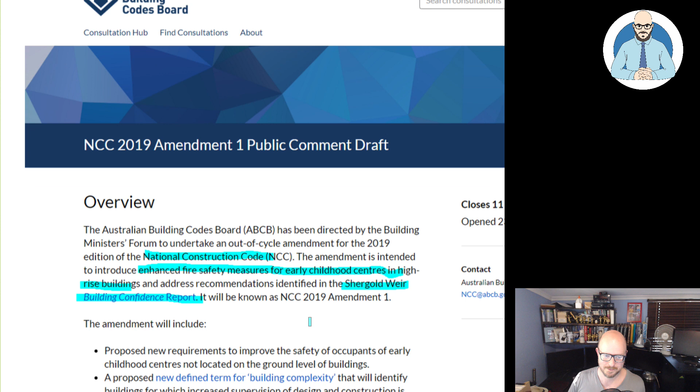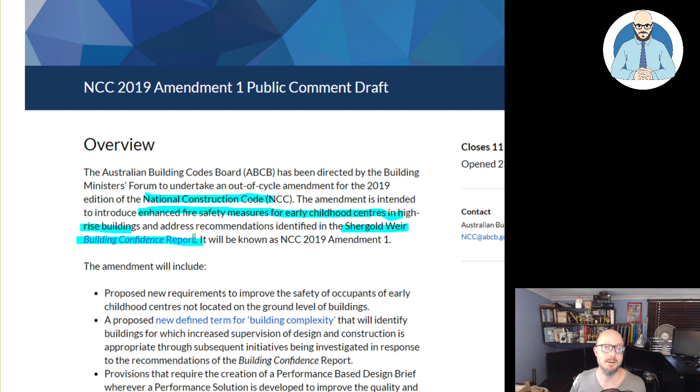Childcare centres in high-rise buildings, because I've seen a few of those and we've looked at them for clients. They're becoming more and more popular. The amendments will include proposed new requirements to improve the safety of occupants of early childhood centres not located on the ground levels of buildings.

A proposed newly defined term for building complexity that will identify buildings for which increased supervision of design and construction is appropriate through subsequent initiatives being investigated in response to the recommendations of the Building Confidence Report. This is interesting. Increased supervision of design and construction.

So provisions that require the creation of a performance-based design brief wherever a performance solution is developed to improve the quality and clarity of such solutions for approval and auditing purposes. This is also in response to parts of the Building Confidence Report recommendation. Okay, this is a performance solution. Now, if you're not familiar, our construction code is actually pretty good. It allows for adaptation and innovation.

That means you can take the code and it'll have a performance requirement that, say, this type of requirement is necessary for acoustic separation between two spaces. Now, you can achieve that anyway. You can hire your own engineer to design a custom system, put a report and submit it, and that will be meeting the performance requirements for the National Construction Code. Okay, and that ticks a box.

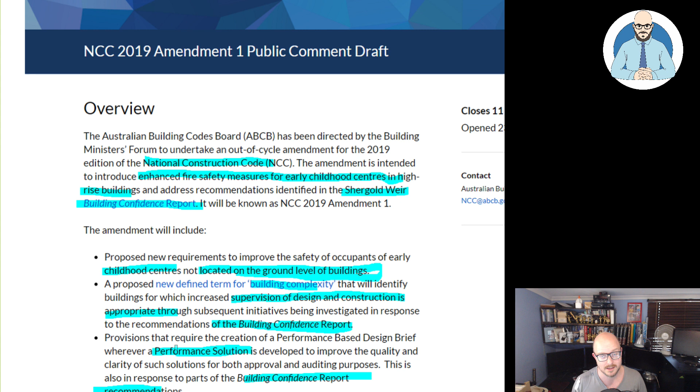You could get a system from a walling manufacturer and install it, and they've got a certificate that they've tested, and that would meet the requirements of the deemed to satisfy provisions. So under the code, they've got the performance ones where you can pretty much invent something. Then they've got deemed to satisfy, which is system instruction in the building code that you can follow, like the size of a footing for a residential house on a standard type of soil. It really simplifies the process.

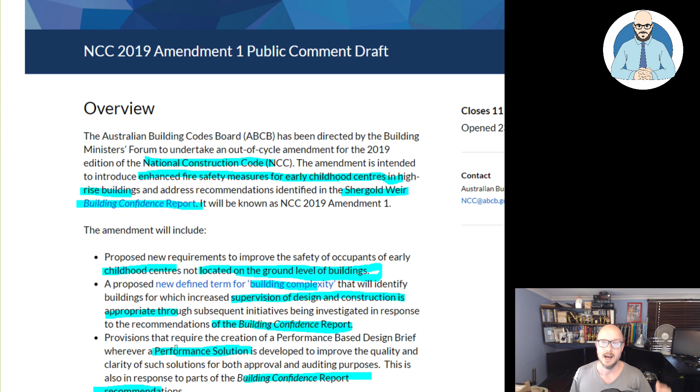So there's two approaches to it. There's an innovative solution and there's a prescriptive solution. So here they want to have a performance-based design brief wherever a performance solution is developed. Okay, so that's very interesting.

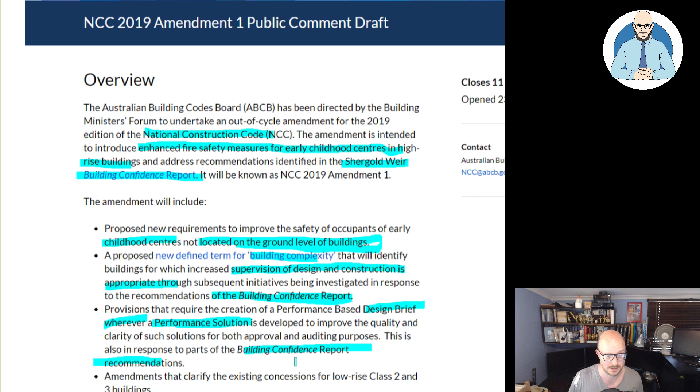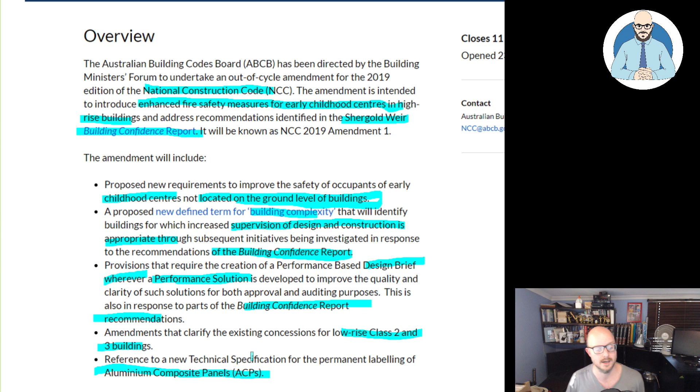Amendments that clarify existing concessions for low-rise class 2 and 3 buildings. Reference to the new technical specification for the permanent labeling of aluminium composite panels. So they're responding to the flammable cladding issues that we've had. So notice this is a response that's coming out of issues that have happened. This isn't going to address any of those buildings, but it's a response to that.

So, okay, links to the public comment drafts, NCC 2019 Amendment 1, are provided below. So you can have a look at these, and you can leave a comment. You can provide a comment and put your input in. So let's have a look.

We will go through first the revised definition of building complexity. The NCC 2019 Amendment 1 public comment draft contains a new defined term for building complexity. This definition establishes a range of complexity levels from 0 to 4, with 0 being the least complex and 4 being the most complex. A building's complexity level considers the potential number of occupants in the building, the vulnerability of those occupants, and the complication presented by technical, geometrical, or environmental factors.

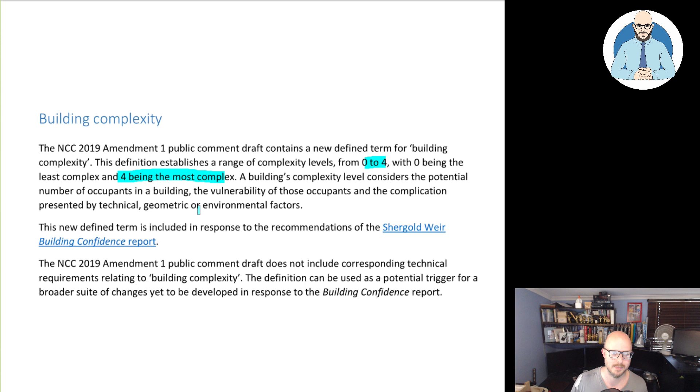Here's the thing with regards to this. The occupants of buildings, that's a big part of designing. As an architect, engineer, anyone, when you're designing a building, you need to take account of the number of people that are in there. One problem with Airbnb is that it changes the occupation numbers and the knowledge that the people will have of that building from one class to another class. It goes from an apartment building to a hotel. So people have a different understanding. There's different requirements for safety that are often ignored.

This new defined term is included in response to recommendations of the Shergold Weir Report, Building Confidence Report. The NCC 2019 Amendment 1 public comment draft does not include corresponding technical requirements relating to building complexity. The definition can be used as a potential trigger for a broader suite of changes yet to be developed in response to the Building Confidence Report.

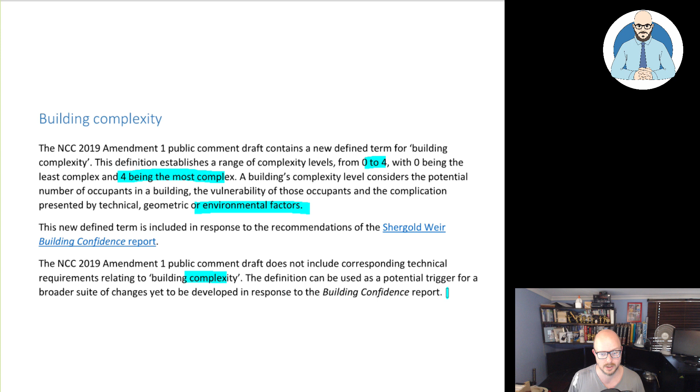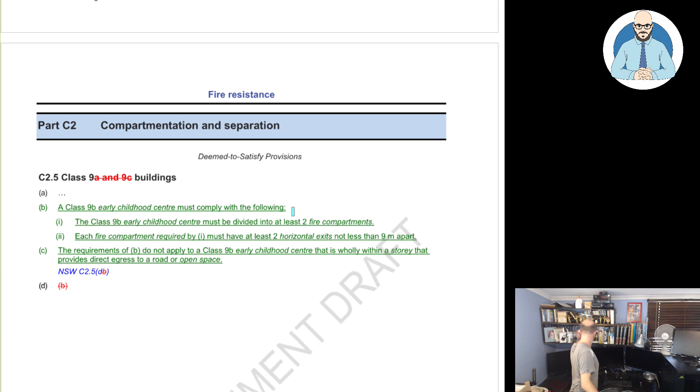Okay, let's have a look at Volume 1, the amendments they're going to give to Volume 1. So guys, this is the... Okay, hang on. Where is it? Here we go. I've got the 2016 version.

I don't buy the physical copies now since the PDFs are free. You know, care for the environment and all that jazz, and I'm a cheap person.

So, Volume 1 is for Class 2 to 9 buildings, everything other than domestic detached houses, pretty much. A big fat book that'll put you to sleep. And here we go. The first change is in Part C2, compartmentation and separation.

Why do I even try to read? Seriously. I blame it because I learned German first as a child. That's what I blame it on.

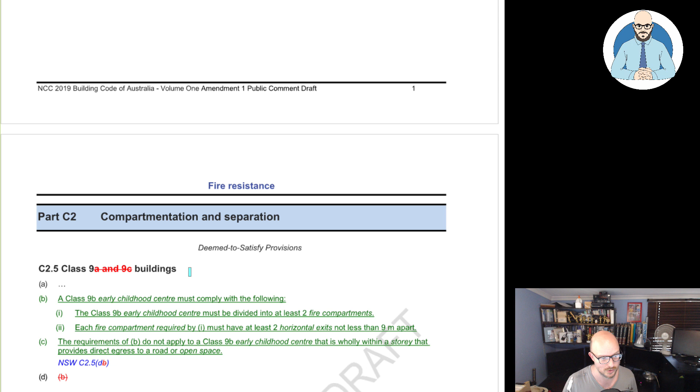So they've removed, it's just Class 9 buildings. So A. So B, they're adding this. A Class 9B early childhood centre must comply with the following. A Class 9B early childhood centre must be divided into at least 2 fire compartments. Each fire compartment required by (i) must have at least 2 horizontal exits, no less than 9 meters apart. The requirements of (b) do not apply to a Class 9B early childhood centre that is wholly within a storey that provides direct egress to a road or open space.

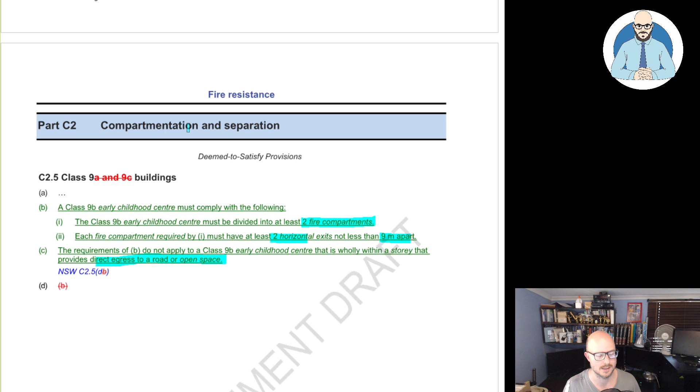So here you go. If one of these spaces catches on fire, there's 2 compartments. So one place is completely separated from the other, and there's 2 options to egress out of each. So that's going to provide significantly increased evacuation options for the children in those spaces. But it's going to be more of a challenge retrofitting these to existing buildings. It's not insurmountable. It's just something you need to be aware of. And they've deleted this clause here.

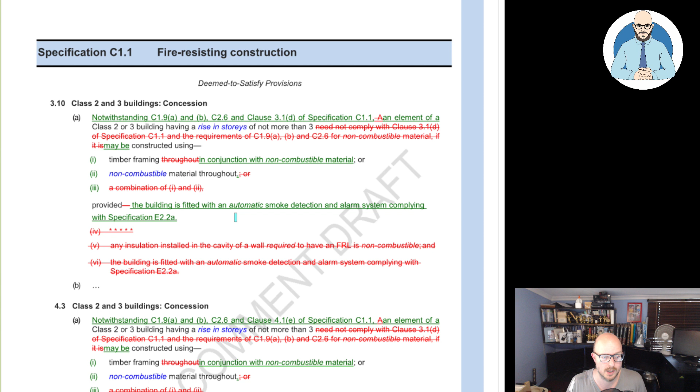Okay. Specification C1.1 fire-resisting construction, Class 2 and 3 building concession. Notwithstanding C1.9(a) and (b), C2.6 and Clause 3 of Specification C1.1, an element of a Class 2 or 3 building having a rise in storeys of not more than 3 may be constructed using timber framing in conjunction with non-combustible materials or non-combustible materials throughout, and they're getting rid of that, provided the building is fitted with an automatic smoke detection and alarm system complying with Specification E2.2a. So you can see here what they're removing.

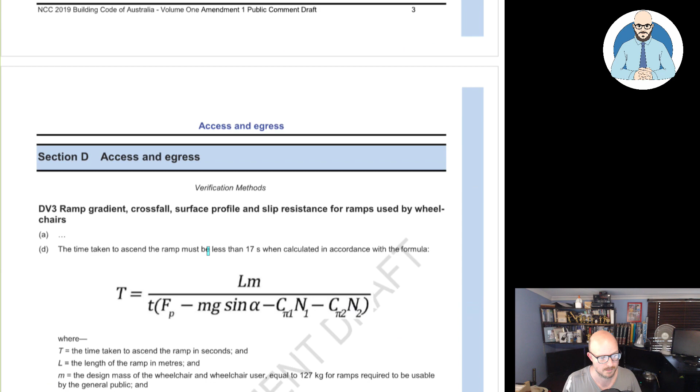Class 2 and 3 building concession, notwithstanding C1.9(a) and (b), C2.6 and Clause 4.1(e) of Specification C1.1, an element of a Class 2 or 3 building having a rise in storeys of not more than 3 may be constructed using timber frame or non-combustible material throughout, provided it's fitted with an automatic smoke detection alarm system compliant with this specification. Okay, cool. So access and egress. Okay, what are they? They're not really making any changes here, are they?

Provision for escape, number of exits. Exits from a class 9C building, 9B early childhood centres, and patient care areas in class 9A healthcare buildings. In a 9A healthcare building, 9B early childhood centre, and a 9C building, at least one exit must be provided for every part of the story which has been divided into compartments in accordance with C2.2 or C2.5. So they've added 9B. They're putting more onerous requirements on the early childhood centres. And they changed that from lowercase to an uppercase.

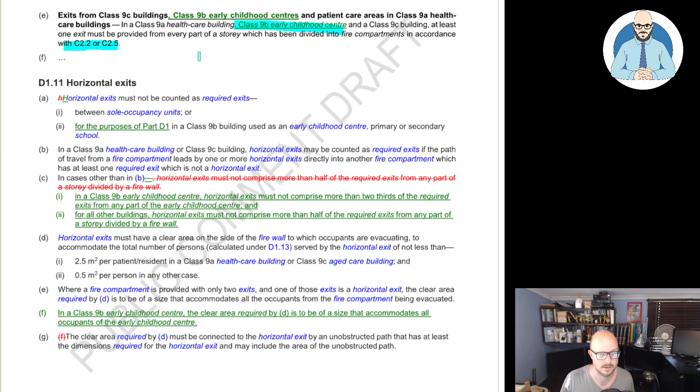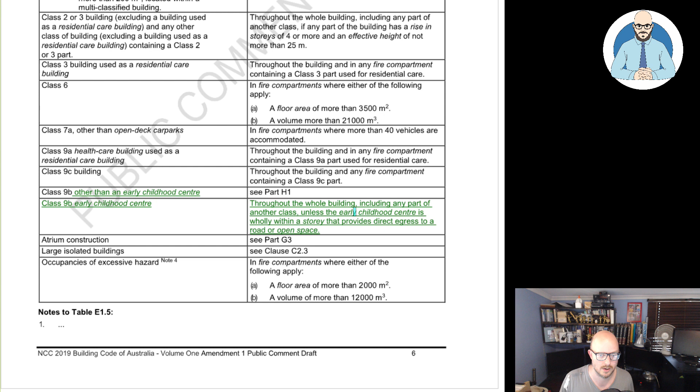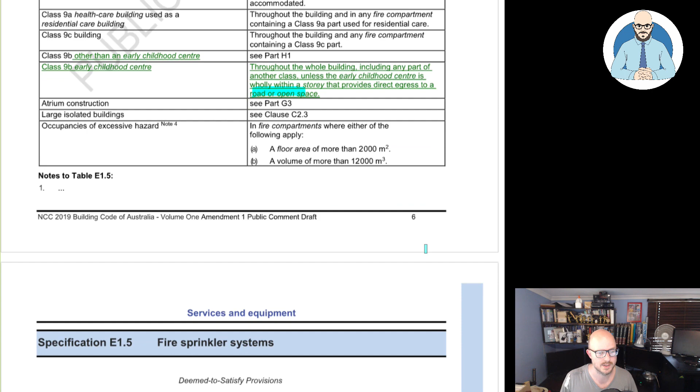Horizontal exits for the purpose of part D1. Here we go. So they're just adding the early childhood centres to these existing requirements for the 9A healthcare buildings and the 9C. Firefighting equipment, here we go. 9B early childhood centres throughout the whole building, including any part of another class, unless the early childhood centre is wholly within the story that provides direct egress to a road or open space. So it looks like they're increasing the egress requirements for these buildings. So it's really nothing to do with the apartment issues that we've had. Guys, this is just with early childhood centre buildings.

So what else has happened in the media? Has anyone heard any issues? Have any childhood centres been evacuated?

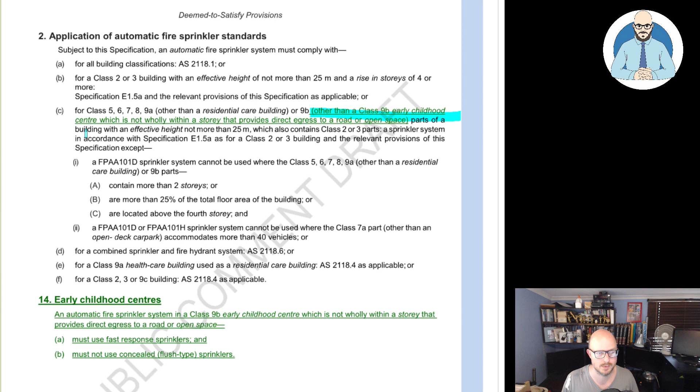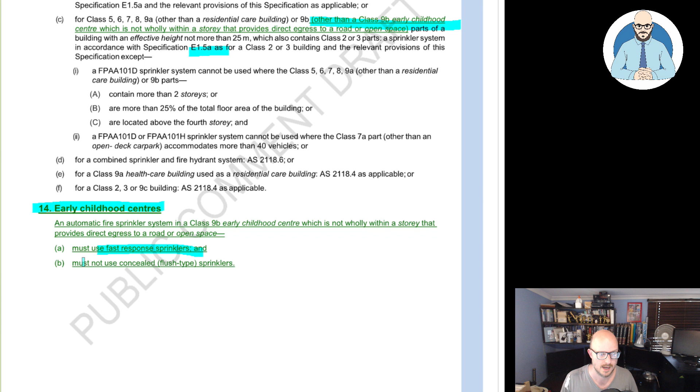Application of automatic fire sprinkler standards. So for class 5, 6, 7, 9A, and now they're adding 9B, other than a 9B early childhood centre which is not wholly within a story that provides direct egress to road or open space. Parts of a building with an effective height no more than this. Okay, sprinkler system in accordance with this specification. Early childhood centres. An automatic fire sprinkler system in a class 9B early childhood centre, which is not wholly within the story that provides direct egress to a road or open space, must use fast response sprinklers and must not use concealed flush type sprinklers.

See, this is the type of details that can get onto the drawings and then needs to get checked. And the certifier will probably go through, do an inspection, notice particular ones, they may miss something. There's no clerk of works on site checking all of these things as well to provide them with support.

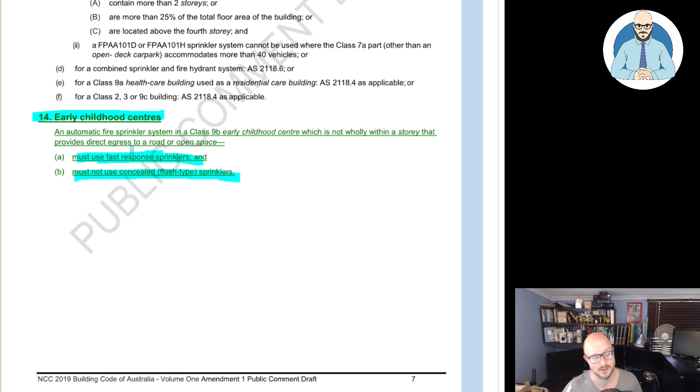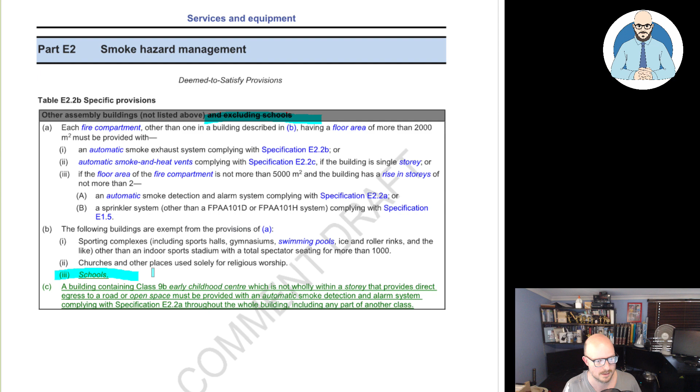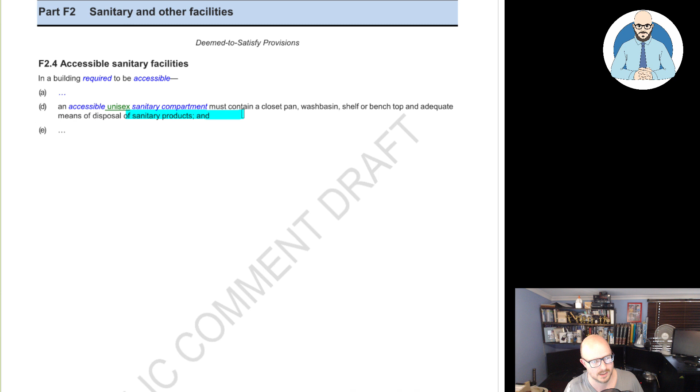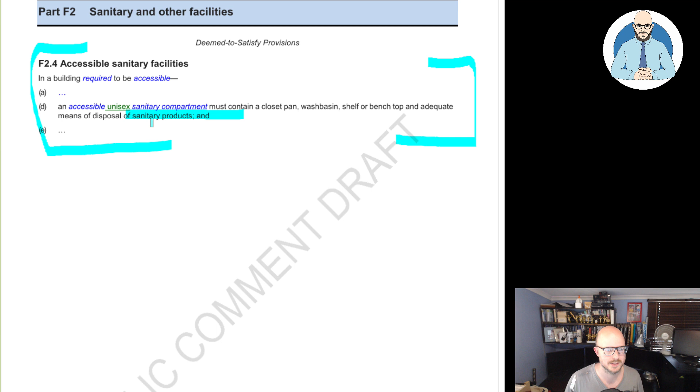Smoke hazard management. Other assembly buildings not listed above and excluding schools. Okay, they've removed the excluding schools requirement. They've added schools to this. A building containing 9B early childhood, which is not wholly within a story. Okay. What do we have here? Visibility in an emergency. So they're adding some changes here with signage. An accessible unisex sanitary compartment must contain a closet pan, wash basin, shelf or bench top, and adequate means of disposal of sanitary products. I'm surprised that has changed. Okay. Well, the thing is, all people with disability toilets are unisex anyway, so I'm not even surprised with that.

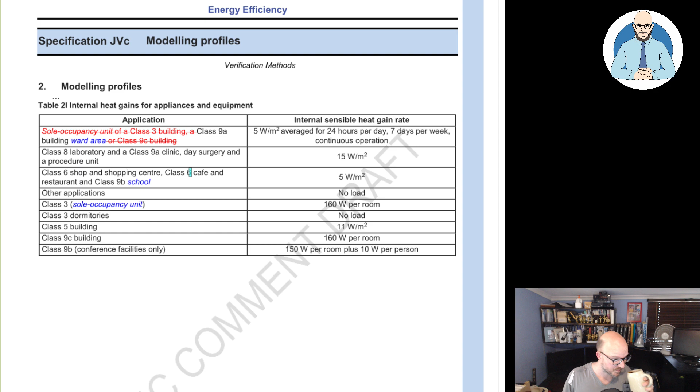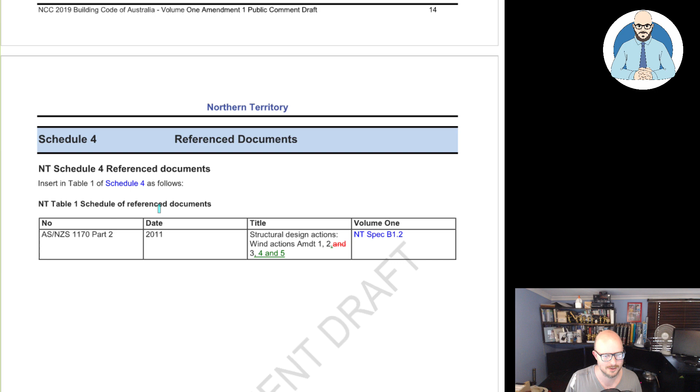So modeling profiles, energy efficiency, okay. Cool. Building fabric stuff, air conditioning, ventilation, really exciting things for the engineers to look at, some reference documents changes. So this is the changes to volume 1. Most of it is to do with early childhood egress out of high-rise buildings, which is going to become more and more common. So all those ones that I've seen out recently, I wonder if they're going to comply with these changes. So I have to take account of that in future.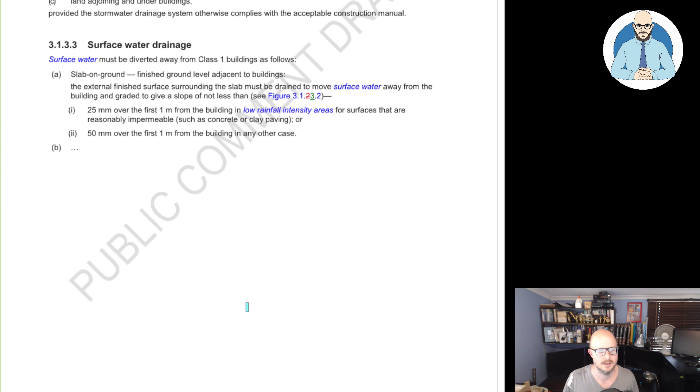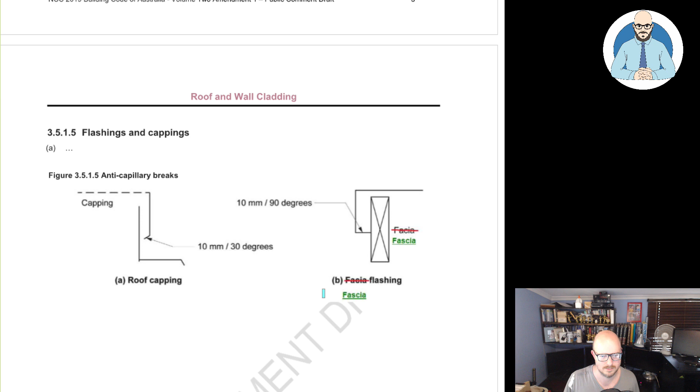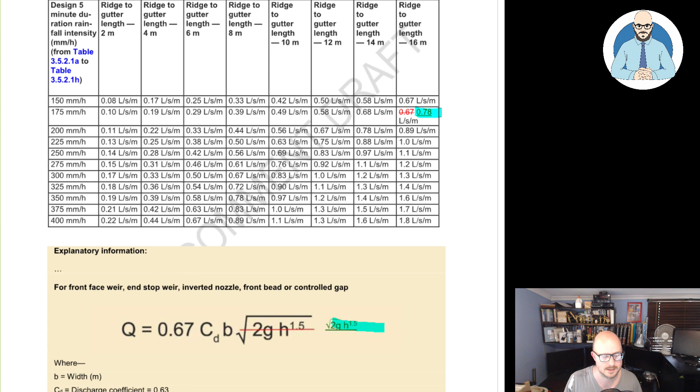So this is volume 2. So you've got volume 1, the bigger buildings, volume 2, the little buildings, detached houses. So what are the changes here? Nothing in drainage, articulated full masonry and articulated masonry veneer. Okay. They changed the spelling, I guess. Changing this formula slightly for overflow volume calculation measures. Okay, ridge to gutter. They've increased that liters per second per meter. Cool. What are they adding here? Okay, so here we go.

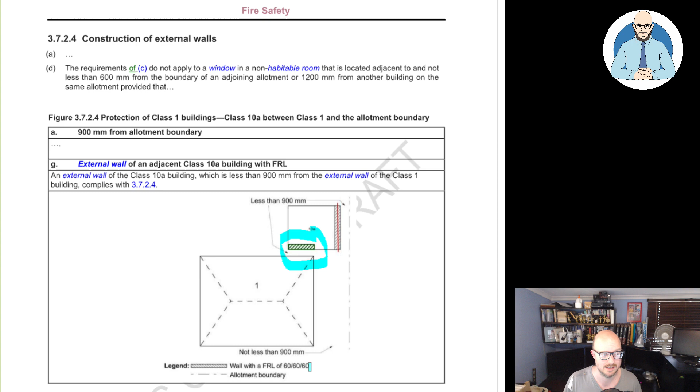Walls with a FRL of 60/60/60. So this wall here, I'm assuming they've added less than 900 millimeters within the building. Okay, that's from a class 10. So this is a garage to your house. That wall needs to have 60/60/60. And that's not too hard to achieve, that rating. Some more fire rating. Yes, well, of course you want that there. I'm surprised they didn't need that.

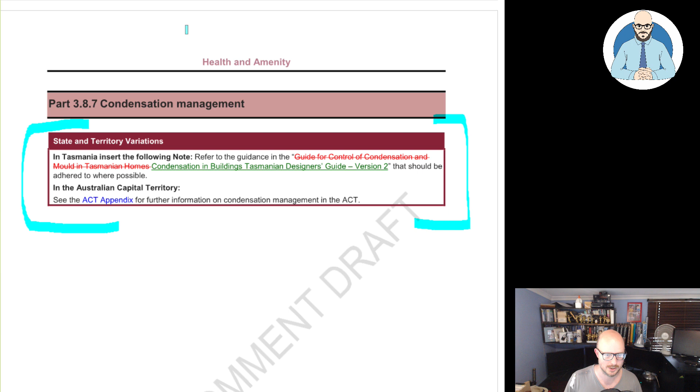Condensation management. Condensation in Buildings Tasmanian Designers' Guide version 2. Okay, this is for the Tasmanians. Actually, yep, Luke, if you're watching, you want to build your own homes, you need to read this, mate. It's changed. Chimneys, I think I've drawn one chimney once in my entire career.

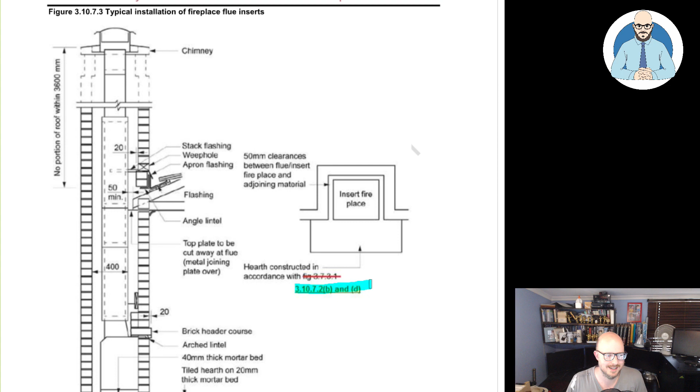And so that's it. Oh, hang on, and there is the governing requirements for common schedules. So Amendment 1, public comment documents. Let's have a look. So where a performance requirement is proposed to be satisfied by a performance solution, the following steps must be undertaken. Prepare a PBDB in consultation with relevant stakeholders. Carry out analysis including modeling and/or testing as proposed by the PBDB. Collate and evaluate results from B against the acceptance criteria. Prepare a final report that includes performance requirements and deemed-to-satisfy provisions identified, identification of all assessment methods used, details of steps A to C, and confirmation that the performance requirements have been met.

Okay, this I think is actually a really good idea, because what can happen is a mistake can happen, or people can cut corners and do a dodgy performance solution, just get a letter written to get around it, or the certifier can just tick and flick. Oh yeah, I'm out of trouble, no problem. So this is requiring a more onerous process, which should be happening anyway.

If you're doing a performance-based solution to get around, or as an innovative approach for the National Construction Code, you should do this. Every professional should have this level of detail. It's just writing a brief. You need it for your own records, for your own due diligence. So I see that as actually quite a good thing.

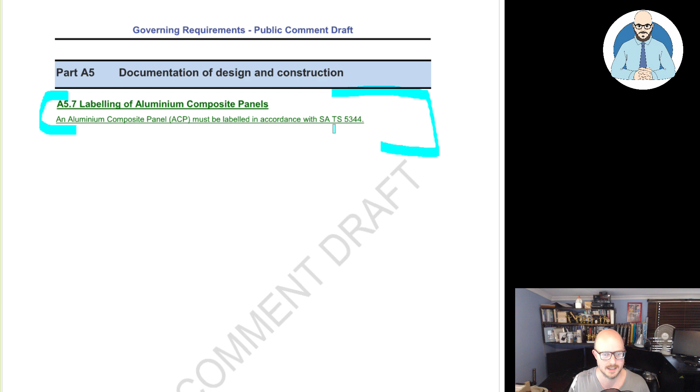Labeling of aluminium composite panels. Aluminium composite panels must be labeled in accordance with SA TS 5344. Fantastic. Here we go. Here's the building complexity section. Okay. Building complexity means through geometric, technical, or scale parameters that increase the risk of oversight or error in a situation where the consequences of oversight or error will be significant. Table 2 defines the building complexity levels from level 0 to 4.

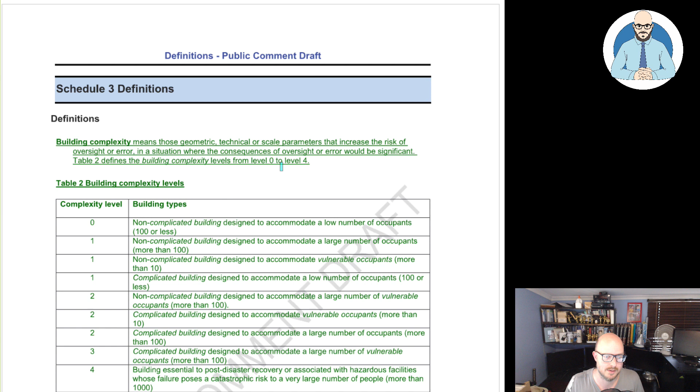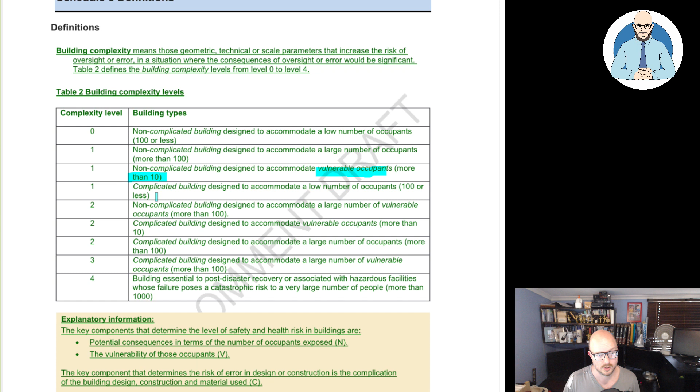So why is this in volume 1? Oh wait, no, sorry, this is in volume 2, it's in its own separate document. Complexity 0: non-complicated building designed to accommodate a low number of occupants, 100 or less. 1: non-complicated building designed to accommodate a large number of occupants, more than 100. Non-complicated building designed to accommodate vulnerable occupants, more than 10. 1: complicated building designed to accommodate a low number of occupants.

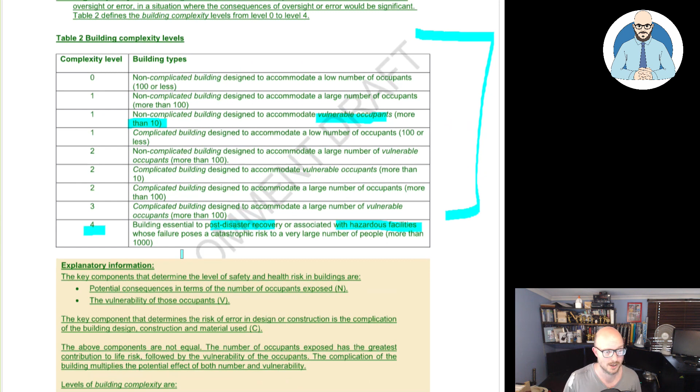2 is non-complicated, designed to... Okay, you can read the rest of this. 4: building essential to post-disaster recovery or associated with hazardous facilities. So I wonder if this is going to have, like, should you be able to do design and construct for some of these? Or if you have design and construct, you need a third party as a clerk of works.

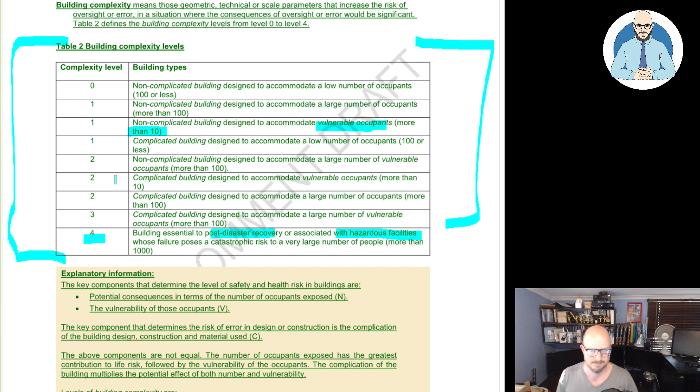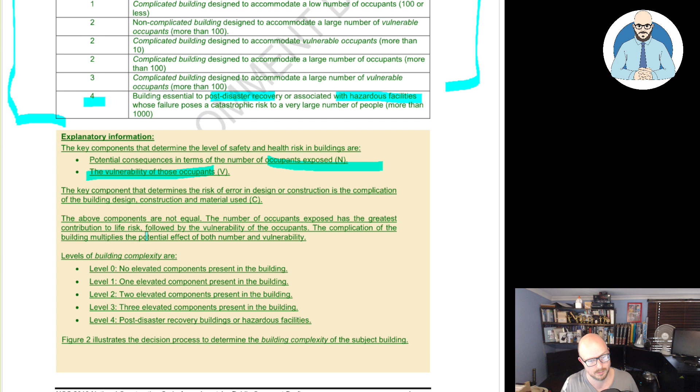The key components that determine the level of safety and health risk in buildings are potential consequence in terms of number of occupants exposed, and the vulnerability of those occupants. The key component that determines the risk of error in design and construction is the complication of the building design, construction, and material used. The above components are not equal. The number of occupants exposed has the greatest contribution to life risk, followed by the vulnerability of the occupants. The complication of the building multiplies the potential effect of both numbers and vulnerability.

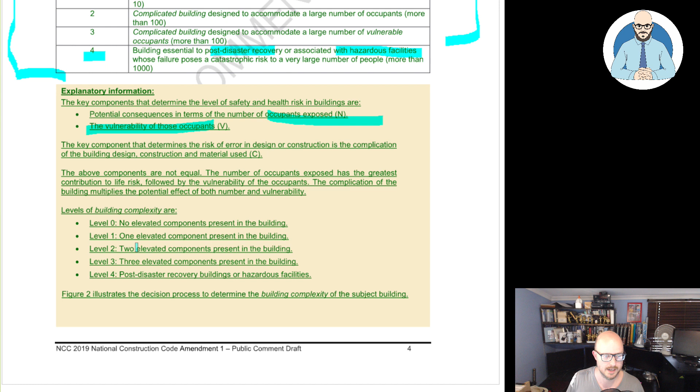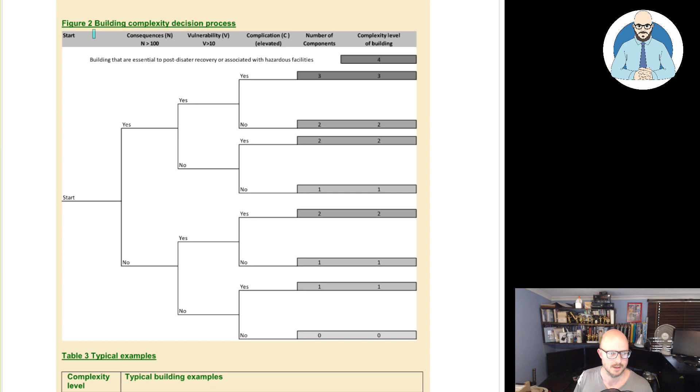Levels of building complexity: no elevated components, and 4 is post-disaster, 3 is elevated, 2 is elevated. Okay, what's the difference? Anyway. Oh, 3, how many elevated components there are? Okay, so here we go. Buildings that are essential to post-disaster recovery, that's 4. So consequences, number greater than 100. So here's the typical examples. Complexity level 0, class 1, a single dwelling. So normal house.

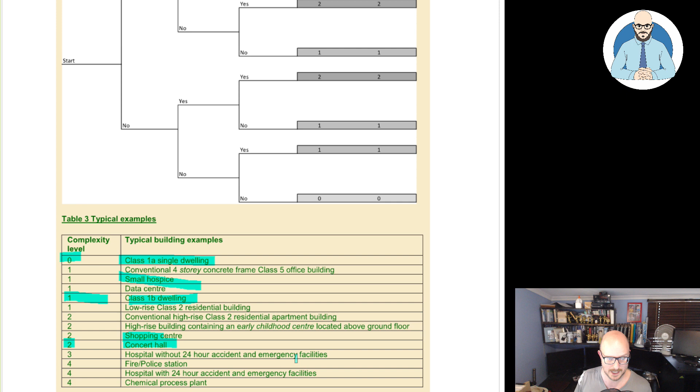Complexity 1 is a small hospice. 1B is a class 1B dwelling. Complexity 2 is a shopping center or a concert hall. 3 is a hospital without 24-hour accident. And then 4 is a chemical processing plant or a hospital or a fire or police station. Complicated buildings means a building having one or more of the following attributes. For volumes 1 and 2, construction using innovative materials or systems, or materials not complying with the BCA deemed-to-satisfy provisions. Okay, cool. We can see why they're responding to that.

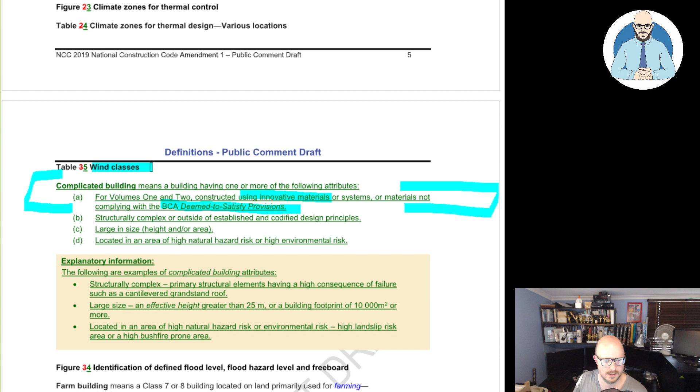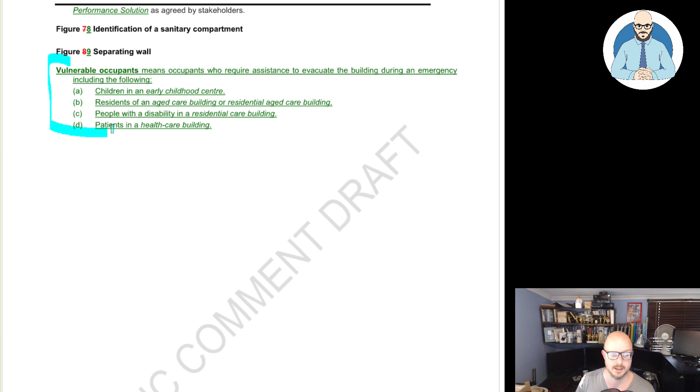So what's this, table 5 wind classes? Climate zones? Oh, they're adding it in there. Okay, cool. Total number of persons. There's a bit more on vulnerable occupants. Vulnerable occupants means occupants who require assistance in evacuating the building during an emergency, including the following: children in an early childhood center, residents in an aged care building or residential aged care building, people with disability in a residential care building, patients in a healthcare building. I mean, that all seems very reasonable.